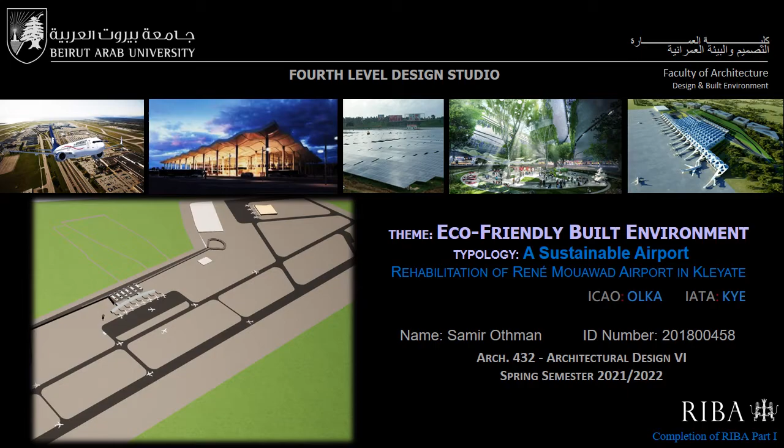Introducing the theme: Sustainability can be seen as the continued ability of a society, an ecosystem, or any such interactive system to function without exhausting the key resources and without adversely affecting the environment. To welcome future space demand and limit global warming, we need to accelerate the shift toward a net zero emission, circular, healthy, inclusive, and resilient built environment.

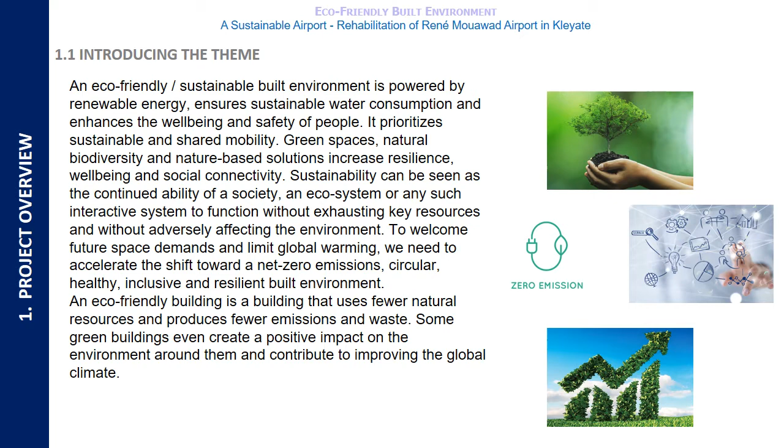Design consideration of airports: the design consideration of the project is to make the passengers and users who go into this place safe and have clear circulation. Architecture-wise, to have a long-span system where I'm using the steel frame structure. Sustainability is one of the most important things to study and use, along with several other considerations.

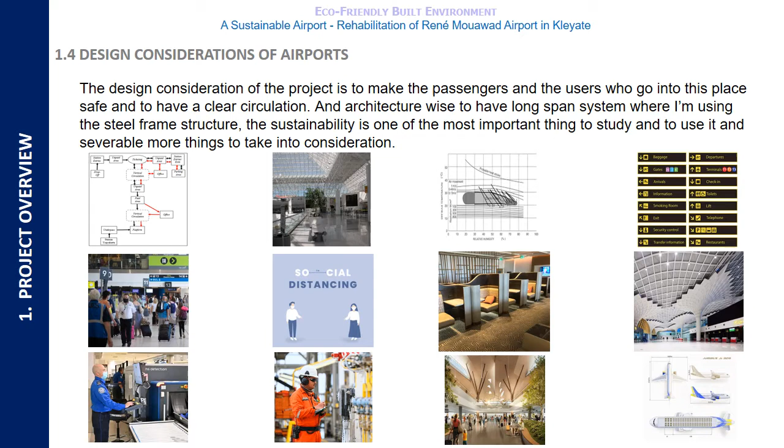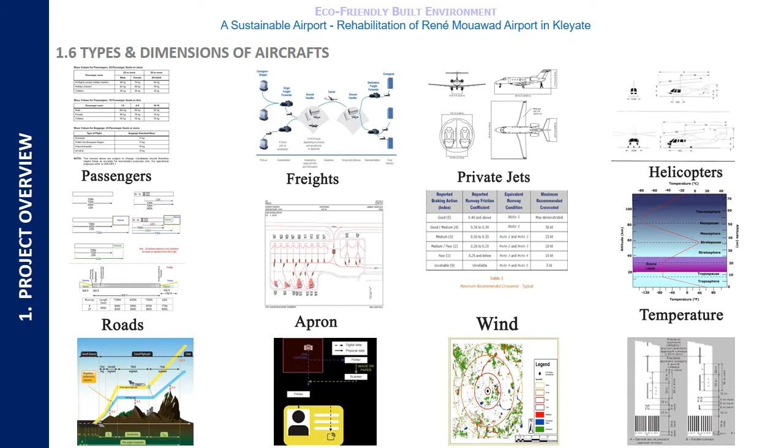The site overview: in the early 1960s, the airbase was a small airport owned by an oil company who used small IPC airplanes for transporting its engineers, staff, and workers between Lebanon and the Arab countries. In 1966, the Lebanese army took control of the airport and started expanding and developing its technological capabilities. It later became one of the most modernized airbases in the region.

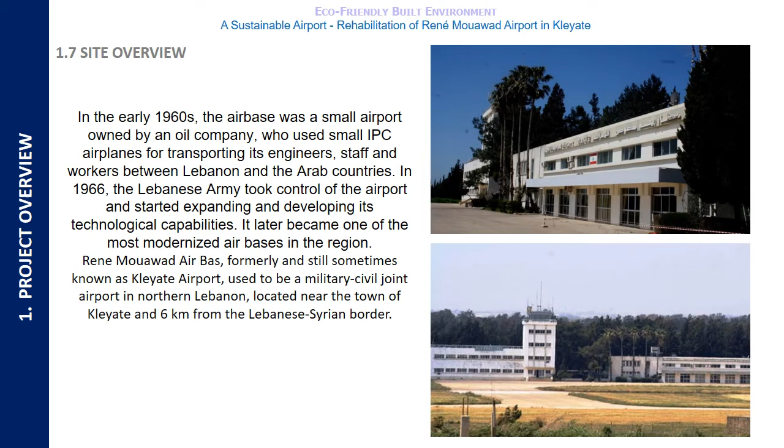René Mouawad Air Base, formerly and still sometimes known as Kleyat Airport, used to be a military-civil joint airport in northern Lebanon, located near the town of Kleyat and 6 kilometers from the Lebanese-Syrian border.

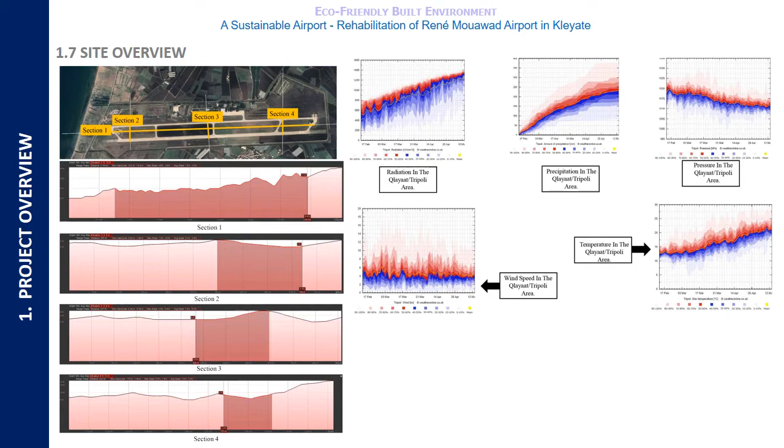My personal philosophy: the project is a rehabilitation of René Mouawad Airport in Kleyat. Nowadays, it's used for army facilities, helicopters, and vehicles. I want in this rehabilitation to rebuild it as a civil airport, so I have redesigned the terminal and used the rest of the good buildings as a hotel, a VIP terminal, and kept some blocks as a historical monument to remember the use of the old airport.

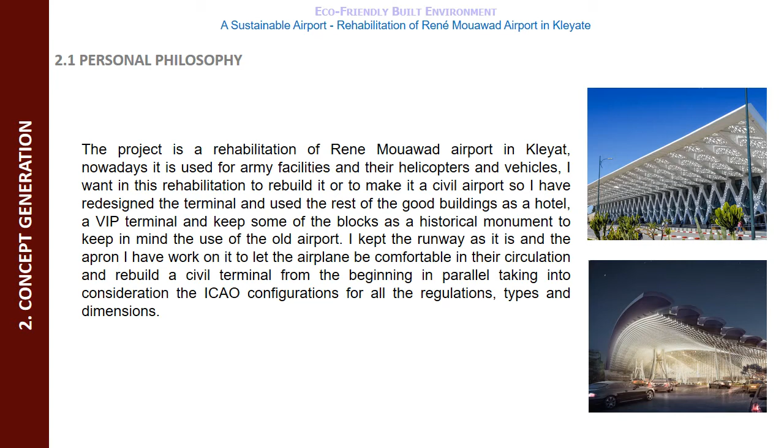I kept the runway as it is, and I worked on the apron to let the airplanes be comfortable in their circulation, and rebuilt a civil terminal from the beginning in parallel, taking into consideration the ICAO configuration for all the regulation types and dimensions.